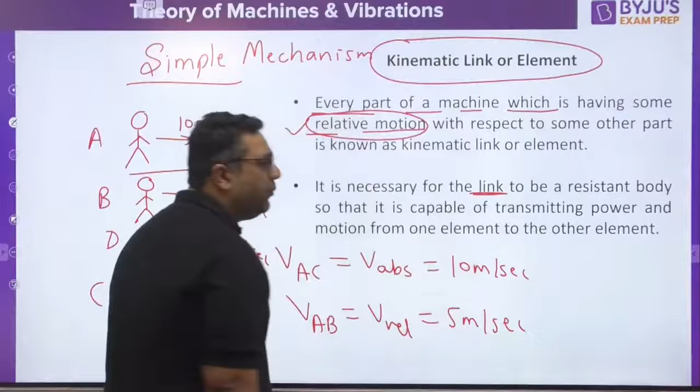So for a kinematic link, relative motion is required. So the second point is, a link may or may not be a rigid body. It may or may not be a rigid body, but it must be a resistant body.

Now what is the meaning of resistant and rigid? I would like to tell you briefly. When we talk about a rigid body, rigid body means deformation is zero, stiffness is infinite. So rigidity is not required, but resistance should be there.

What do you mean by resistant? Resistant means it must be capable of transferring the motion.

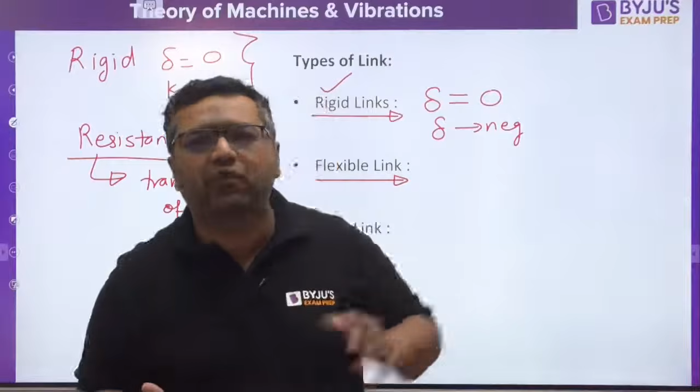Then we are talking about flexible link. Those links which may give some deformation before transferring the motion. For example, belt drive, rope drive. These are some wonderful examples of flexible link.

Third one is fluid link. Sometimes fluid also acts like a link, because you must have seen this type of device for the first time in 6th class, where there is a fluid inside and we apply a force, and with a small force we are capable of lifting a car. As fluid is there, when you apply pressure here, pressure will come here too. Here the area is more, so pressure into area gives force. So force will be more, and you can lift the car.

So all applications like hydraulic brake, hydraulic ram, hydraulic intensifier, hydraulic jack, all these applications are related to the application of link as a fluid link. And as I already said, turbine will not be coming in this list, turbine has some different principle. Is it clear for everyone?

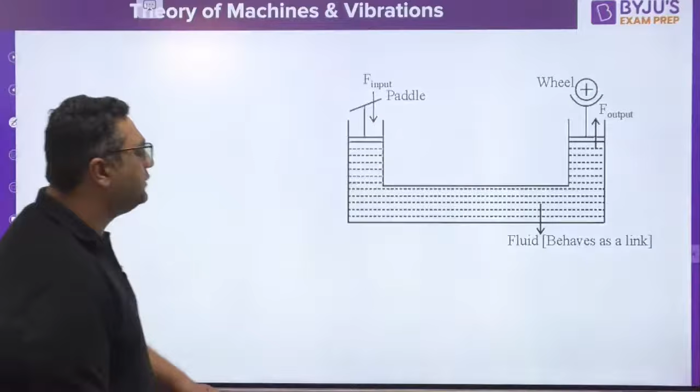We are talking about the types of relative motion, because for anything to be a link, it must have some relative motion. There are three types of relative motion: completely constrained, successfully constrained, and incompletely constrained. Incompletely constrained can also be called unconstrained.

What is the meaning of constrained? Whenever more than one possibility of motion is there, like in your childhood in 11th or 12th class, you had many places to go - you could go for studies, play games, or go to bad habits with bad friends. You had a lot of options, but your parents restricted your motion so that you could go for studies only. Whenever we have a lot of possibilities of motion but want some particular motion, we need to restrict the other motions. If we want the desired motion, we need to restrict the other undesired motions - that is said to be constrained.

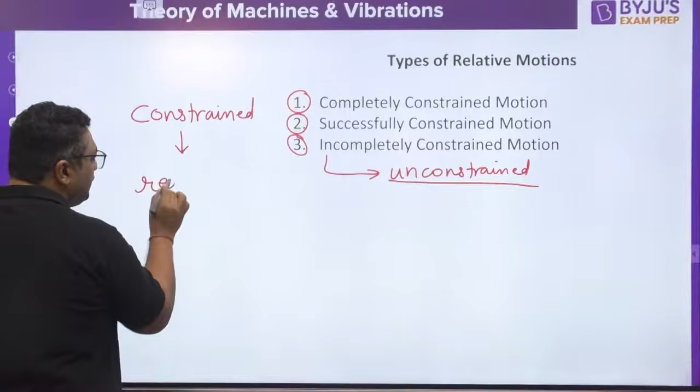So constrained is nothing but a kind of restricted motion. Constrained motion is nothing but a restricted motion. Whenever we have a lot of types of motion, we restrict the other motion and go for a single motion - that is called constrained motion.

When the constrained motion is possible by system configuration - meaning the system itself is not allowing any other kind of motion - we call it completely constrained motion. When you need to apply some forces to make the motion constrained, it is called successfully constrained motion. And when motion remains unconstrained no matter what you do, such motion is called unconstrained motion.

There are some examples. If you have a square shaft in a square hole, the square shaft cannot rotate - it can only have this one motion. So here the system configuration is not allowing any other kind of motion, and we call it completely constrained motion.

If you have a shaft like this, and on this shaft you have a collar, and you keep it in a circular hole, this reciprocating motion is not possible because the collar will not allow it - only rotation is possible. So this is another example of completely constrained motion, where the system configuration is not allowing any other motion.

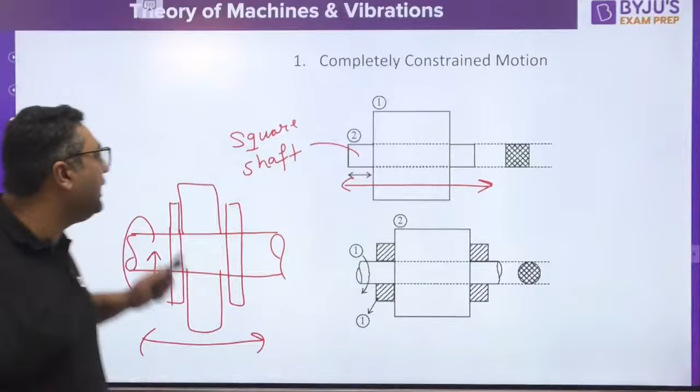Now we come to successfully constrained motion. The example is footstep bearing. This shaft can rotate and reciprocate, but you have applied an external force because of which this reciprocating motion will not be permitted - now the shaft can only rotate, but this is happening only because of this applied force. So this motion is called successfully constrained motion.

Yes, Shivananda, hi dear, how are you?

Third is incompletely constrained motion. Here you have a circular shaft in a circular hole without a collar. So this shaft can both rotate and reciprocate. Such a motion is said to be unconstrained motion.

In theory of machines, we are making mechanisms and machines only for production, so that in production we can have a desired motion of the cutting tool with respect to the workpiece. That is why in theory of machines we are always looking for constrained motion.

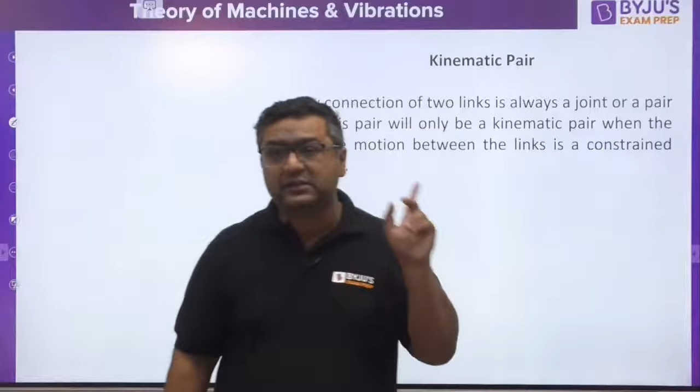Moving to the next thing, that is kinematic pair. Whenever two links are connecting with each other, it is said to be a pair - any connection between two links is said to be a pair. And if the relative motion between those links is a constrained motion, it is said to be a kinematic pair. So every kinematic pair is a pair, but every pair is not a kinematic pair. As I said, any connection is a pair, and if the relative motion is constrained, it is a kinematic pair. In theory of machines, we are looking for constrained motion.

Now we are going to classify the kinematic pairs. The first classification is according to the type of relative motion. The first type of pair is turning pair. If we have two links connected like this, these links can have rotation with respect to each other, because about this point they can only rotate. Such a pair is a turning pair.

You can see this example - between this part and this part of your hand, there is a turning pair. Then we are talking about sliding pair. Sliding pair means we have a cylinder and a piston, and between them we have a sliding pair.

Because the piston is going to slide over the cylinder.

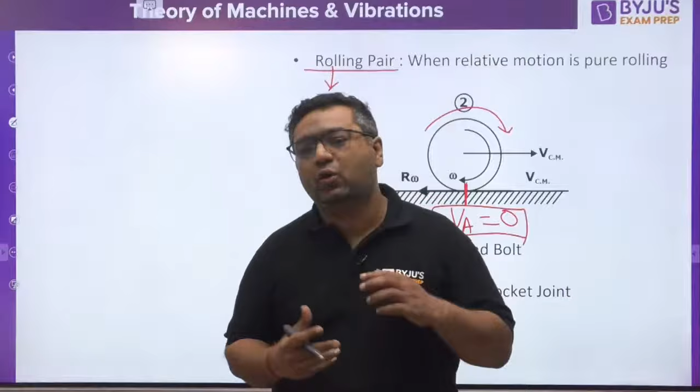It generally has a meaning when the area remains the same throughout the length. So in that perspective they are calling it a prismatic pair.

Okay Shreyas, so now please tell me, does anybody want me to explain what pure rolling motion is, or do you already know that? Let us see, if you want to see.

In pure translation motion, every point has the same translational velocity. Every point will be having the same translation velocity like this. So if this is having 5 meters per second, every point will be moving with 5 meters per second.

This is pure translation. When we are talking about pure rotation, the velocity profile is linear like this, and the center will be having 0 velocity. This type of motion is said to be pure rotation.

So in pure rotation, if this velocity is 5, this velocity will be 0, and this velocity will be -5. So if I add both the motions, what is going to happen?

First of all, understand what pure translation means. If this body is moving without rotating, it is pure translation. If this body is rotating about one point, this is pure rotation.

So if you are going to add both the motions, this 5 and this 5 will become 10. And this 0 plus this 5 will become 5. And this 5 and this -5 will become 0. So this is going to be the velocity profile.

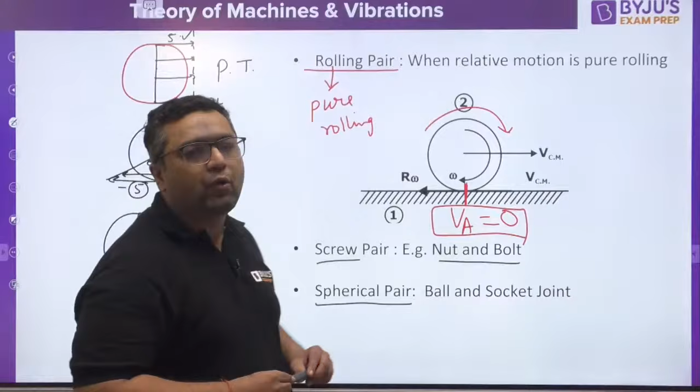So my dear, screw pair — you know, the nut bolt connection. Then spherical pair, if you want to understand, it is the ball and socket joint of your body. It is a bike mirror. It is your hand.

You can see 3-dimensional rotation is possible — 1st dimension, 2nd dimension, 3rd dimension. So between these two there is a spherical pair, between these two there is a turning pair. So likewise, there are a number of pairs in our body that God has given, and here the motion is going to be 3-dimensional rotation.

Okay guys, so this is the first classification over. We are moving to the second classification. Here are the examples of all. This is a turning pair, pure rotation.

Prismatic pair is pure translation, you can see the cross section remains same throughout the length. Screw pair is like a nut and bolt. Spherical pair gives 3D rotation. Cylindrical pair, and this is planar pair. These we have not seen before, but we are going to see them as well.

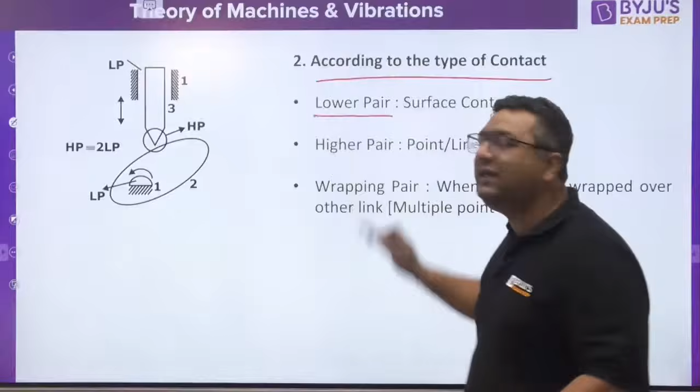Now we are going to see the second classification, and this is according to the type of contact. As per the type of contact, there are three types of pair: lower pair, higher pair, and wrapping pair.

Lower pair is whenever the contact between two links is a surface contact, and higher pair means point or line contact. Like in rolling pair, we were having point contact, so these two bodies are connected at point contact, and this is an example of higher pair. Similarly, between cam and follower also you can see there is a point contact, so it is also considered a higher pair.

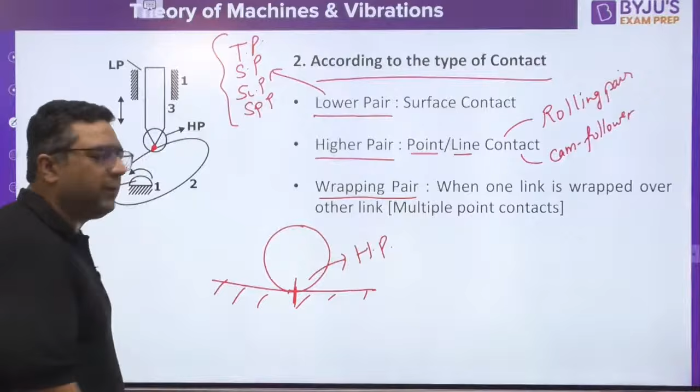But if you see the sliding pair, the complete cylinder and piston are in contact, complete surface is in contact. So if you see other types of pair like turning pair, sliding pair, screw pair, spherical pair, all these are examples of lower pairs, because this part and this part are not connected at a point, they are connected at a surface. So you will be calling them lower pair.

Whenever one body is going to wrap over another, like belt drive, rope drive, chain drive, where one body is wrapped over another, it is given the name of wrapping pair.

Sometimes the examiner in the question does not give wrapping pair as an option. He just asks that belt drive is an example of, and in the options you will be having lower pair, higher pair, option C both lower and higher pair, option D cannot say. So in this kind of case, generally students feel it is lower pair because they feel surface contact is there.

But in reality, the pulley is also not having a very good surface finish. So the pulley in reality looks like this, there are some surface roughnesses and irregularities. Similarly, if you are talking about rope or belt, that also has that kind of surface, so the contact is at multiple points. Because of this multiple point contact, we are considering it as higher pair. So if wrapping pair is not in the option, we will call it a higher pair.

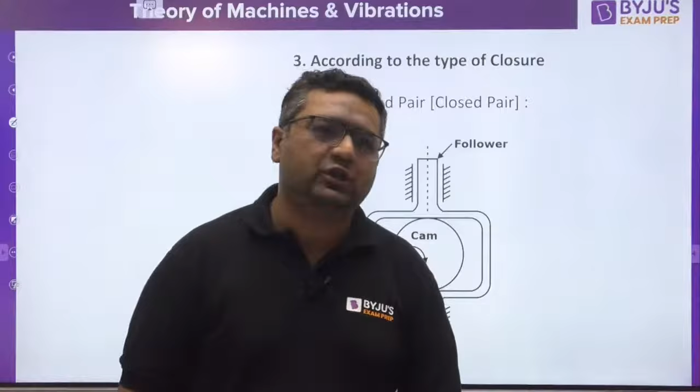Now we are going to see the third type of classification, that is self-closed and force-closed pair. Self-closed means here the cam is inside the follower, so as the cam rotates, this follower will go up or down. This is the case of a self-closed pair.

Whenever we have forceful connection, here when the cam is going to rotate, the follower will be having upward motion, so to maintain contact between them, we are keeping a compressed spring here, forcefully maintaining the contact. In the previous case, even if the follower wants, it cannot go away from the cam because the cam is inside the follower. But in this case, the follower can go upward, and the spring is there to maintain the contact between them, so this is forceful contact, and it is said to be a force-closed pair.

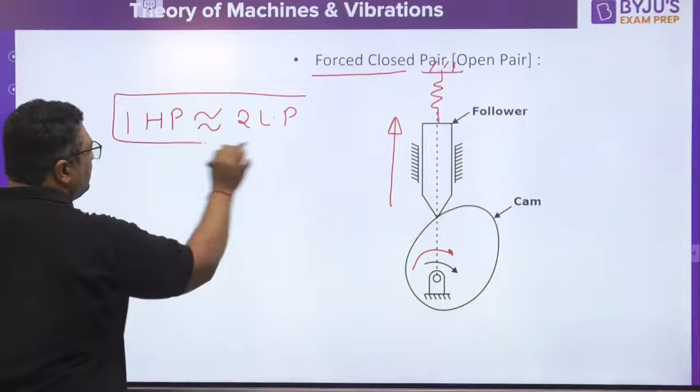One more thing I would like to tell you, that one higher pair is equivalent to two lower pairs, because one higher pair is doing the same work which two lower pairs together are doing.

So when we look at this higher pair and lower pair connection, you have this cam and follower. This is link number 1, cam is link number 2, follower is link number 3, and this is link number 1 again. So total number of links are 3. This is a turning pair because rotation is going on, this is a sliding pair because sliding is going on, and this is a higher pair.

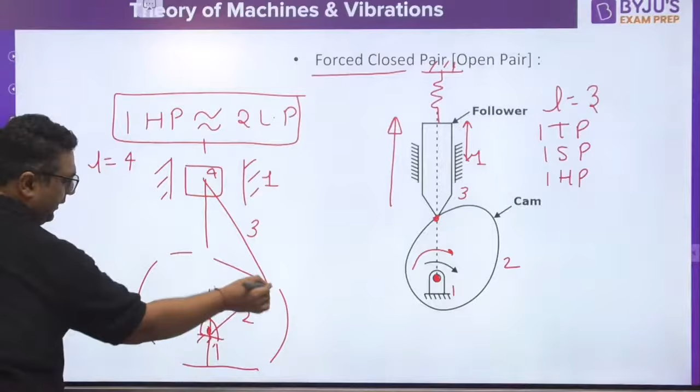So there is one turning pair, one sliding pair, and one higher pair. On the other hand, if we talk about a slider having sliding motion inside the cylinder - this is connecting rod, this is crank, and this is fixed. This is link number 1, link number 2, link number 3, link number 4, link number 1. So links are 4 here. This is turning pair, this is turning pair, this is turning pair, and this is sliding pair.

So we have 3 turning pairs and 1 sliding pair. In both mechanisms, rotation is converted into translation. Rotation of crank gives you translation of slider, rotation of cam gives you translation of follower. So any two mechanisms, if they produce the same type of motion, they may look different in your eyes, but as per theory of machines, if two mechanisms give the same relative motion, they have the same meaning. So according to theory of machines, both are doing the same work.

So if that is the case, both are equivalent mechanisms. Here we have 2 lower pairs and 1 higher pair, but here we have 4 lower pairs. It means 2 lower pairs are equivalent to 1 higher pair. So the purpose solved by 1 higher pair here is the same done by 2 lower pairs there. Always remember, 1 higher pair is equivalent to 2 lower pairs.

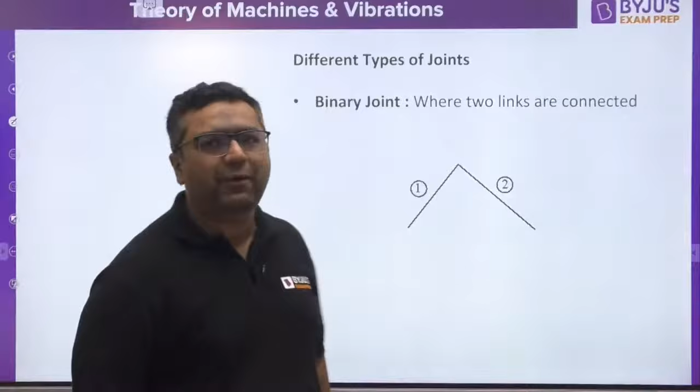Moving further, now we talk about different types of joints. When 2 links are joined together like this, you can see link 1 and link 2 are connected at one joint - it is said to be a binary joint. When we have 3 links connected at one joint, it is said to be a ternary joint, and one ternary joint is equivalent to 2 binary joints.

Why? Because if you make a binary joint between 1 and 2, that's one binary, and a second binary between 2 and 3, the third binary you get automatically. That's why one ternary is equivalent to 2 binary joints. Quaternary means where 4 links connect together, and one quaternary joint is equivalent to 3 binary joints. You might be thinking why we convert these to binary - because all our formulas in theory of machines use the binary joint in the formulas. That's why we convert all joints into binary. So one ternary is 2 binary and one quaternary is 3 binary.

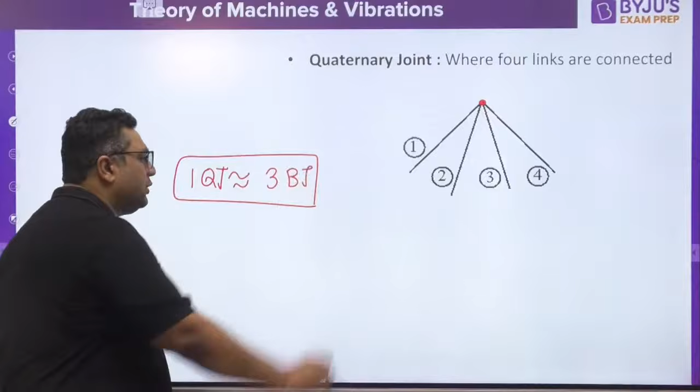Are you getting it, guys? Everyone, please tell me that.

Then we move to kinematic chain. Slowly we are moving towards the word mechanism. We have already discussed what is a link, and we have discussed what is a pair. Now we talk about the chain. When a number of links are connected together such that the first and last link are also connected, it is said to be a chain. And if the relative motion between all those links is constrained, then we call it a kinematic chain.

Whenever we have a kinematic chain, if we fix one link of that chain, it becomes a mechanism. And whenever we use a mechanism or a group of mechanisms to get some work output, it becomes a machine. Like an IC engine is a machine - the single slider crank mechanism chain, whenever one link is fixed, is said to be a mechanism. So when it is used, it becomes a machine.

So my dear, if you want a machine, for that we require some mechanism. And when will you get a mechanism? When we have a kinematic chain. So overall we are looking for a kinematic chain. As I said, this is a revision session - whatever you studied in 80 hours, I am going to complete in 2 to 2.5 hours, so don't compare. Those who have already studied theory of machines will get a good revision. So when we are looking for a kinematic chain, chain will become mechanism, mechanism will become a machine. For that there are some conditions.

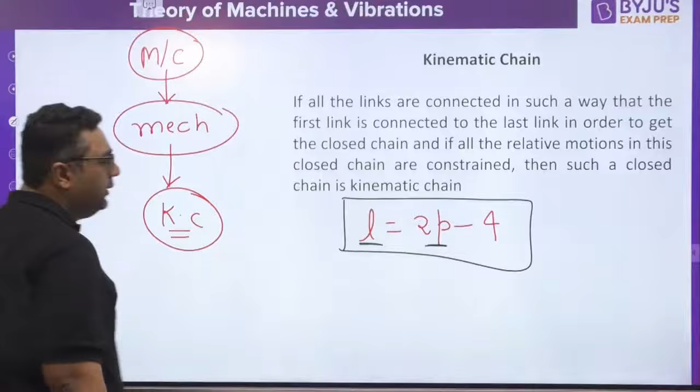So we have joint is equals to 3 by 2 L minus 2. Here L is the number of links, J is the number of joints. But don't worry, we are going to use the formula of degree of freedom, so we need not write this. I will directly be telling you the degree of freedom, otherwise you will get confused, and the degree of freedom formula comes from that only.

So you have studied this formula: F is equals to 3L minus 1 minus 2J minus H. This is what you have studied for degrees of freedom. This formula actually comes from the same one I was writing properly. So this is what you need to remember - I am not writing other formulas because this one formula will solve all the purposes. Why? Because finding out the kinematic pair is going to be difficult, so it's better we go for the degree of freedom formula.

So we are reaching the concept of degree of freedom. This is the first heading from where numericals are coming. When we are talking about degrees of freedom, you must be aware that degree of freedom is the number of independent motions in a mechanism.

So if we have any link in 3 dimensions, we can have 6 types of motion: translation in X, translation in Y, translation in Z, rotation about X, rotation about Y, and rotation about Z. So 6 motions are possible, meaning maximum degree of freedom of a link in 3 dimensions is 6. If any of the motion is restricted, we call it F is equals to 6 minus R.

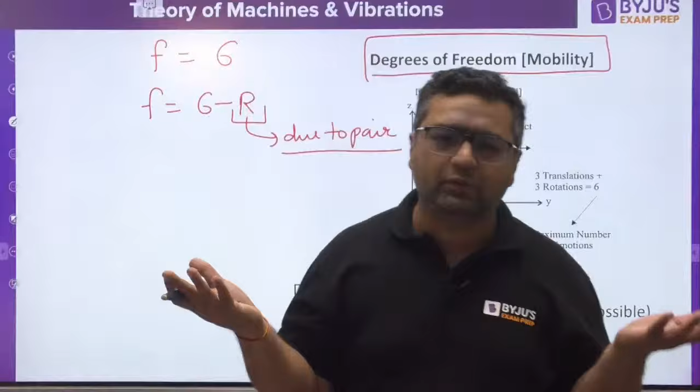But why will these restrictions come? Due to pairing. Whenever you have pairing with someone, restrictions come. Living alone, you have 6 degrees of freedom, meaning you are enjoying the maximum degrees of freedom. When you have relationships, you have to be restricted based on that relationship, otherwise the relationship can break. So some restrictions come, and the formula becomes 6 minus R - this is the formula for degree of freedom when a link has some pairing arrangement.

You might have one confusion - why not degree of freedom are 12? For that you must be aware that 12 degrees of freedom are considered in the production part. Why? Because there, if we have a workpiece like this and tool like this, if the cutting tool is moving in this direction, cutting will happen. In this direction, cutting will not happen. So there, positive X and negative X will have different meanings.

But in theory of machines, our target is to create motion. So as we are only talking about creating motion, for us X direction positive or negative, we consider the same. As this is the formula revision session, I would directly be writing the formula for degree of freedom for a mechanism.

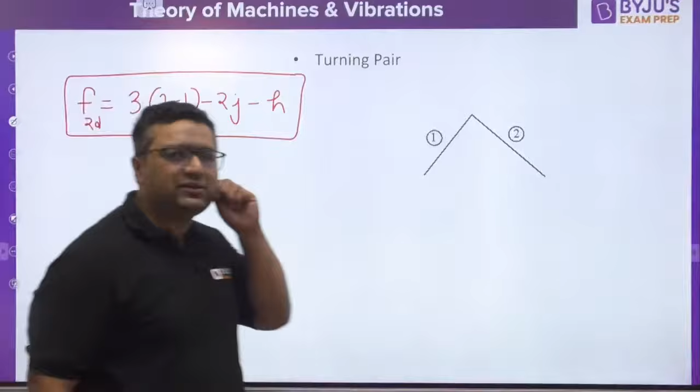When we are having a mechanism, the equation is 3L minus 1 minus 2J minus H. This is the formula for degree of freedom for a mechanism in 2 dimensions, because in our syllabus 3 dimension is not there. In 3 dimensions maximum motions are 6, in 2 dimensions maximum motions are 3. So for a link maximum are 3, and for a link in a pair it is 3 minus R.

So when we are talking about a turning pair, the link can have only one rotation motion. All other motions are not possible. That is why for a turning pair, degree of freedom becomes 1.

Now you would remember when I was teaching in class, I took 30 minutes for that turning pair. But here it is a revision session, so I would just be giving you a revision. This session is helpful for those who have already studied theory of machines and just want a quick revision for remembering things, nothing else. The same subject which I taught for 80 hours, I am going to deal with in 2.5 hours. Only formulas are there, but this is a very good session for revision purpose.

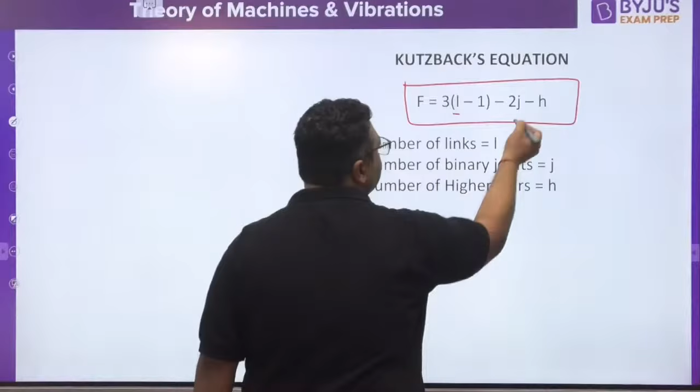So this equation I wrote before is said to be the Kutzbach equation. L is the number of links, J is the number of binary joints, and H is the number of higher pairs. There I also told you how this equation came into picture, if you remember that, and I also derived this relation, how it comes. Here no derivation, we are directly writing the formulas. I feel you understand because this is a formula revision session.

Moving further, there are some cases where some redundant motions are there. What is redundant motion? If you see here, this link is placed with a sliding pair in this groove. So this time it is not connecting with a turning pair, but with a sliding pair. So if you give a slight push to this link, it will go away, and if this link goes away, the motion of this link will not affect the input and output link. So if any motion is present in a mechanism which is possible without having the motion of input and output link, such motions are said to be redundant motions.

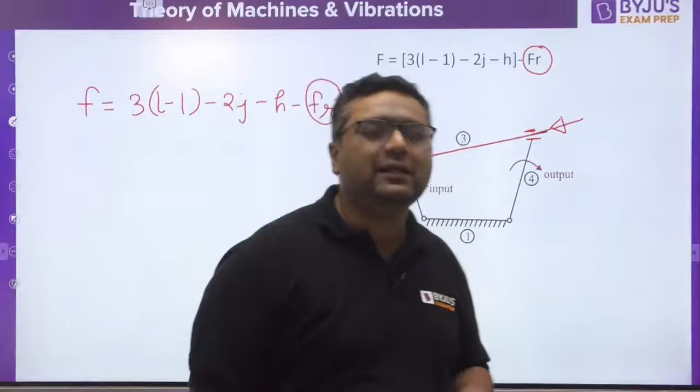And if you want to find out the degree of freedom of this, we need to subtract this redundant motion part. So the equation was modified and given the name modified Kutzbach equation: 3 into L minus 1 minus 2J minus H minus FR. Here FR is the redundant degree of freedom. So this link, you will not say the link has no use — that is different, that is the concept of redundant link. It is not redundant link, it is redundant motion. This link is having an extra motion which can be reduced because that is not playing any part in degree of freedom. That is the point.

In actual, what will happen — if you give rotation to this link, it will go away and this will become a 3-link thing. And you know, whenever this happens it is becoming a truss. Truss is not having any relative motion, so degree of freedom for this truss is going to be 0, you know that. So that is why we are using this.

So if you are going to use it, number of links are 4. Number of joints — sliding pair is also considered as binary joint. This is also binary, this is also binary. So this is 2 into 4. There is one redundant motion. So the answer will be coming out to be 0 because it is converting into a truss like that. That is why the answer will be coming out to be 0.

So guys, this is Kutzbach paradox. Kutzbach paradox.

This is something on which neither Kutzbach equation is valid nor modified Kutzbach is valid. Because if you see this, we have link 1, 2, 3, 4 and 5. So the number of links are 5. The number of joints are 1, 2, 3, 4, 5, 6, so 6 joints. And there is no higher pair, no redundant motion.

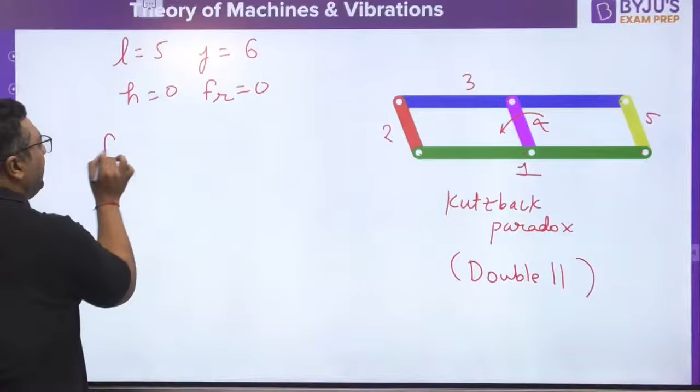Why? Because if you try to rotate this link, the entire mechanism will rotate, because it is a double parallelogram linkage. It is a double parallelogram linkage. So my dear, when you apply the formula 3 into L minus 1 minus 2J minus H minus FR,

FR is 0, H is 0. You will put 3 into 5 minus 1 minus 2 into 6. So you will be having 12 minus 12, and the answer will come out to be 0.

But you know this linkage is used in railways to couple the wheels. And where you are coupling the wheels in the railways, you have seen this motion going on, that's why the wheels are rotating. So the degree of freedom is coming out to be 1 actually. So degree of freedom should be 1, but here we are getting 0. So as the Kutzbach equation is giving a wrong answer, we call it the Kutzbach paradox.

The reason is, if you see the motion of link number 2, 4 and 5 - if you have this link number 4, or if you don't have link number 4, the relative motion between input and output link will not change. So this is a situation where we can say link number 4 is a redundant link. It means we can remove this link for calculation purposes because it has the same motion as input and output.

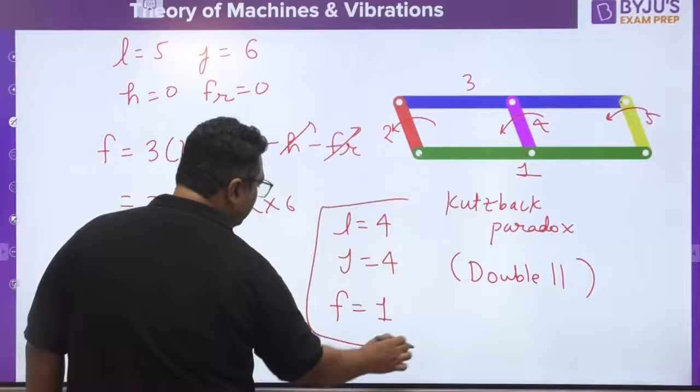That is why for calculation purposes we remove such links, and if you remove this, it becomes a 4 bar mechanism. The number of links will be 4, the number of joints will be 4, so the answer will come out to be 1. So that is how redundant link and redundant motion are two different things.

Okay, moving further, Grubler's equation. You know that Grubler said we are talking about the mechanism for which higher pair is 0 and degree of freedom is going to be 1. So he was interested in mechanisms made up without any higher pair.

I feel you would be remembering, when degree of freedom is 0, we are getting a frame. When degree of freedom is 1, we are getting a mechanism. Degree of freedom more than 1, we are getting unconstrained motion. Okay, so when we have degree of freedom 1, higher pair 0, let us see the formula of Kutzbach.

You know higher pair 0, degree of freedom 1. This is the equation: 3L minus 2J minus 4 is equal to 0. If you see this equation, 3L minus 2J minus 4, or 3L equals 2J plus 4.

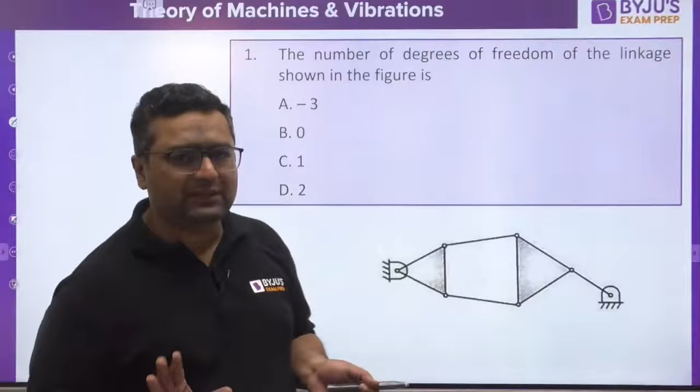Okay, so this is a question I am taking - otherwise this is formula series, but still I am taking one question for your convenience.

Okay, this is link number 1. This is the hashed part, link number 2, link number 3, link number 4, link number 5, link number 6, and back to link number 1. So you can say, my dear, number of links are 6.

If you see the joints, binary, binary, binary, binary, binary, binary, and binary. So 1, 2, 3, 4, 5, 6, 7. Number of joints are 7.

Degree of freedom formula is 3 into L minus 1, minus 2J, minus H. Higher pairs come out to be 0. So you put 3 into 6 minus 1, minus 2 into 7. So guys, it is going to be 15 minus 14. Answer will be 1. So this is how the first type of questions are coming on degrees of freedom.

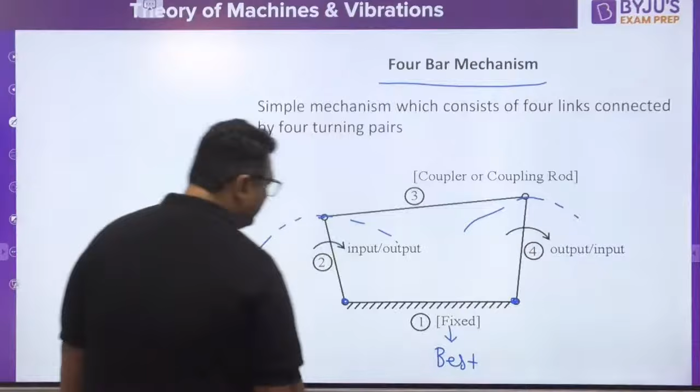If you see, the motion of input and output are going to be pure rotation because they are connected with the fixed link. So because of that, their motion is well-defined. That is why this is said to be the second best position, as the motion is well-defined.

But my dear, when we are talking about link number 3, which is just in front of the fixed link, this is said to be the coupler. This is not connecting with the fixed link, it is connected with the 2 moving links. So my dear, that is why its motion is not a well-defined motion.

Its motion is a general motion. I am not saying it has variable velocity, but it has variable motion. Sometimes it has translation plus rotation components, sometimes translation will be more, sometimes rotation will be more. So the motion of this link number 3 is given the name of general motion.

General motion is a combination of translation and rotation, and that is also a rough combination. So translation and rotation components are also variable. Sometimes translation will be more, sometimes rotation will be more. So such motion is given the name of general motion.

In this mechanism, there are 4 turning pairs, 1, 2, 3 and 4. So guys, whatever I have shown you, you can compare these positions.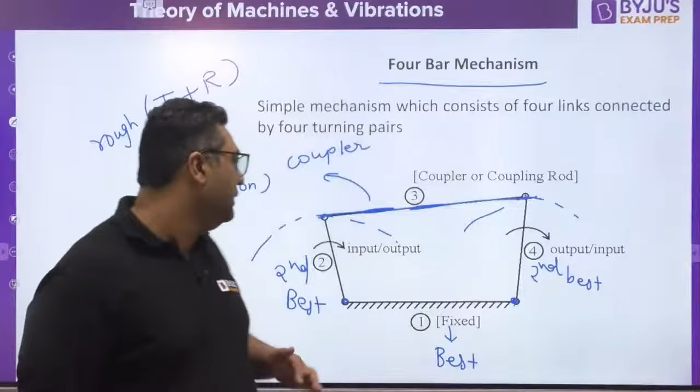Like link number 1 is the best position, this position is governing the motion of all. It is like the position of the Prime Minister in our country or our father at home, who is going to govern everything. Then the second best position is like the position of ministers or bureaucrats, who can do things for themselves at least. This is the position of the common man, who is going to be dancing based on the rules coming from these other sides.

Okay, so these are the analysis of 4-bar mechanisms.

Now we are going for inversions, which is a very, very important heading, and from here a lot of questions are coming.

So when we talk about inversions, my dear, if we have a 4-link kinematic chain, 1, 2, 3 and 4, this is a kinematic chain. You know that if I want to make a mechanism from a kinematic chain, what do I need to do? I need to fix one link of this kinematic chain, and I will get a mechanism.

But which link will I be fixing? For that I have 4 choices: choice number 1 link, choice number 2 link, choice number 3 link, choice number 4 link. So one by one, first I will fix 1, then I will fix 2, then 3, then 4, only one at a time, and I will get a set of mechanisms. That set of mechanisms is given the name of inversions.

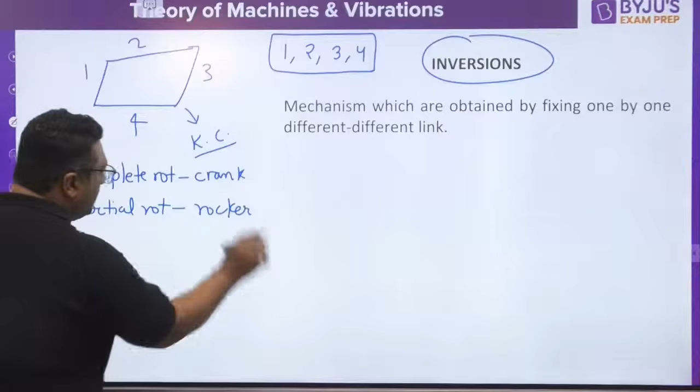So my dear, first of all, we are going to fix link number 1. Whenever we have fixed link number 1, we have seen the input is having complete rotation, meaning crank. Output is also having complete rotation, meaning crank. So the name of the mechanism is crank mechanism or double crank mechanism. This is the case when two links are going to have complete rotation like this.

Second, if we are going to keep link number 2 as fixed, we have seen that the input link was found to be crank and the output link was found to be rocker. So input was having complete rotation and output was having partial rotation like this.

Then my dear, we have seen the third possibility where link number 3 was kept fixed. Then we found this was becoming the rocker and this was becoming the crank. So this time this was rocker and this was crank, opposite to the previous one.

When we have fixed the fourth link, we are getting rocker here and rocker here. These are the 4 possibilities I am talking about. So rocker means this type of motion. This type of motion is rocker mechanism.

So guys, if you see these 4 possibilities, you can say these are 4 inversions. But my dear, the reality here is, if you see crank rocker and rocker crank, if I am saying this is crank rocker and I rotate it by 180 degrees, it will become rocker crank. So if you have a machine in your home and you rotate it by 180 degrees, the name of the machine is not going to change. So the point is, crank rocker and rocker crank is only one type of relative motion. And until we have one type of relative motion, those mechanisms cannot be different.

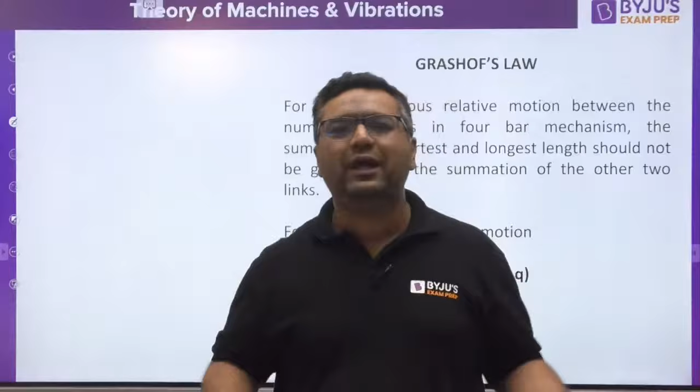Then we are moving to the Grashof law. So my dear, we have seen the types of inversions we can get. Now out of those types of inversions, when are we going to get what? This was given by Sir Grashof, and he has given a wonderful law on that.

Sir Grashof said that you should look for at least one crank. Why at least one crank? He was looking for a continuous motion. Crank is rotating continuously, whereas rocker has a discontinuous motion. So if you are looking for continuous motion, which comes with crank, he was looking for at least one crank in a mechanism. At least one crank means either double crank mechanism, which will give you continuous motion, or crank rocker mechanism, which will give you continuous motion. Double rocker has this discontinuity like this. He wanted continuity.

So Grashof said that if you want at least one crank, then the summation of the shortest and longest link should be less than or equal to P plus Q. There are 4 links: one is shortest, other is longest, other is P, other is Q.

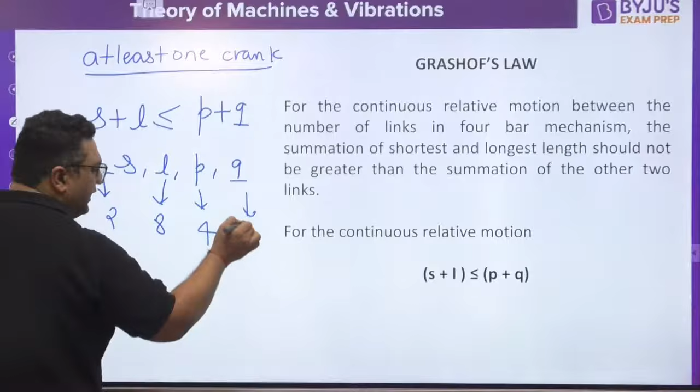So let us say one link has a length of 2 mm, other has a length of 8 mm, this has a length of 4 mm, this has a length of 5 mm. So you can see here 2 plus 8 is becoming more than 5 plus 4. So this is the case when Grashof's law is not valid. And when it is not valid, you are going to get discontinuity, which is nothing but the double rocker mechanism.

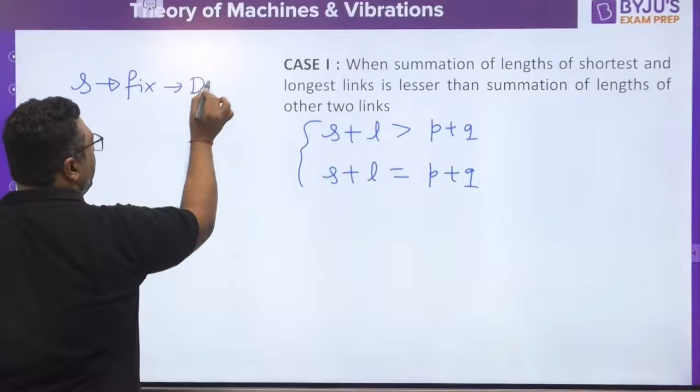If we have these two cases, then what Sir Grashof said is: if you keep the shortest link fixed, you will get a double crank mechanism. This is based on the observation of Sir Grashof. If shortest link is fixed, the mechanism will be given the name of double crank mechanism. And if the shortest link becomes either the input link or output link, then you will have a crank rocker mechanism. And when the shortest link becomes the coupler, you will have a double rocker mechanism.

Now, this was the condition where even though the Grashof law is satisfied, still we are not getting any crank. So this was a challenge to the Grashof law, but since Sir Grashof did this work over 5 to 6 years with a lot of observation, maybe it is not valid for this case, but we still call it a law, and we say this happens because of misutilization. Because where you want to keep the shortest link is totally your choice. If you keep it as the coupler, you will not get any crank, meaning you intentionally want a double rocker mechanism. So that is the feeling behind crank rocker and double crank mechanisms. We have already talked about this case.

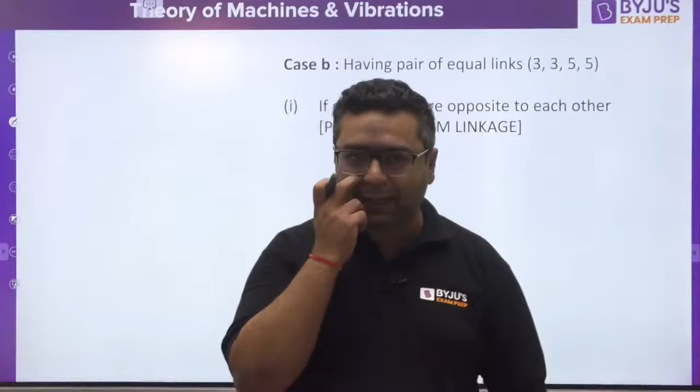So now we are talking about the third case, where we have two shortest links and two longest links. This time two links have the same length, and the other two links also have the same length. If you connect them, again S plus L becomes equal to S plus L, so the law is satisfied. This time two mechanisms are possible.

The first mechanism is when you connect shortest with longest and longest with shortest. Then you get what is called a parallelogram linkage. And when you connect shortest with shortest, longest with longest, then this linkage is called a deltoid linkage.

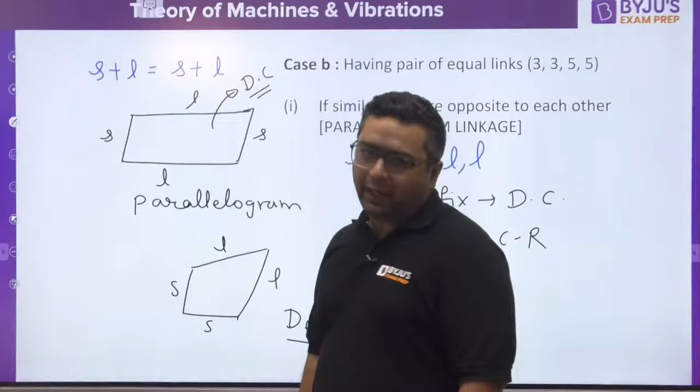In these two mechanisms, there is something special: you will always get one crank. If the shortest link is fixed, you will have a double crank. If the longest link is fixed, you will have a crank rocker. And if you are talking about the parallelogram linkage specifically, in this case you will always get a double crank. That's why these chains are also called the golden chains.

In the classes, I have derived this for you, that's how 80 hours are converted into 2 to 2.5 hours. Here I am just telling you, but there I was deriving all the things and showing everything with animations. So guys, that's why these are called golden chains, as they always follow the Grashof law.

Everybody understood now? Are you getting it? Because this is a formula series, and in 2 hours I need to cover all the formulas, so I cannot go for detailed animations and derivations.

When the law is not satisfied, you will say it's a double rocker mechanism. So we have covered this. Now we are coming to something very important: the application of the 4-bar mechanism.

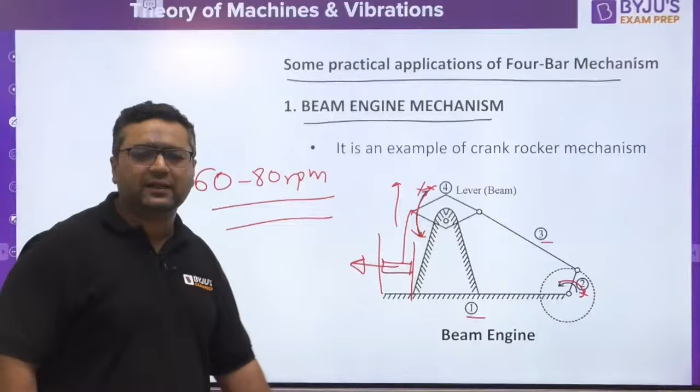Second is the coupling rod of locomotive. If you want to join two wheels of a train, you will have this coupling rod joining the two wheels. This is a parallelogram mechanism, so this is said to be the coupling rod of locomotive. Even if you are going to join three wheels, you need to go for the double crank mechanism. Is it clear?

Yes guys, so we have seen these applications of the simple 4-bar mechanism. This is the animation of the coupling rod of locomotive, showing how the wheels are coupled with each other.

Now I am telling you about the transmission angle. In this simple 4-bar mechanism, if it is a crank rocker mechanism, then this link is given the name of crank, and this is given the name of rocker. So with this as crank and this as rocker, this angle is given the name of crank angle.

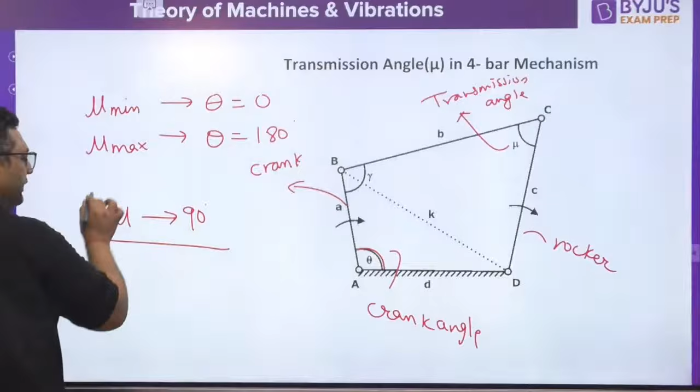And this angle is said to be the transmission angle. When we did the derivation in class, we got to know that this transmission angle is minimum when theta is 0, and maximum when theta is 180 degrees. The transmission angle should be near to 90 degrees. If it goes much beyond that, lesser than 45 degrees or more than 115, 135 degrees, the mechanism will become a low quality mechanism and may not have complete output motions. So you have studied this about the transmission angle.

Now we are talking about mechanical advantage. Mechanical advantage is defined as output force by input force, or output torque by input torque. In thermodynamics we defined efficiency as power output by power input. Power output is given as torque output into omega output, or torque input into omega input. So if you see this, efficiency can be written as mechanical advantage into omega output by omega input.

So you can see that mechanical advantage can be written as efficiency times omega input by omega output. This is the relation between them. Efficiency is always less than or equal to 100%. Mechanical advantage is always more than 100%, otherwise it will not be an advantage. So guys, as I said, I am telling you all the formulas directly.

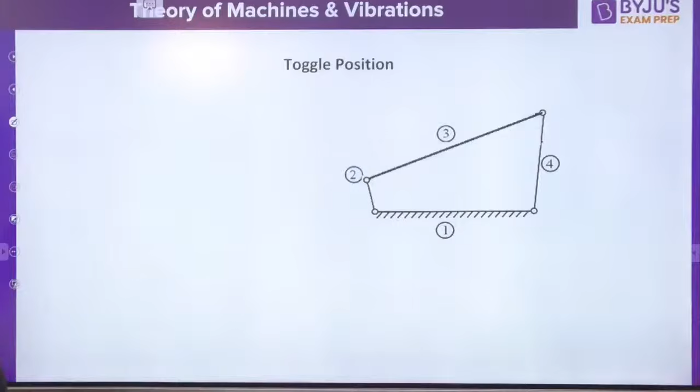Now I am talking about the toggle positions in a mechanism. Toggle position is a position when one link is going to change its direction of motion. If it is a crank rocker mechanism, the crank will rotate like this and the rocker will have this motion. So when the rocker reaches this or this position, it is going to change the direction of motion. So for these two positions, the velocity of link number 4 becomes 0, and these positions are said to be the toggle positions.

Why is it so? Because if you see the mechanical advantage formula, it was efficiency times omega input by omega output, and the fourth link is output. So at this position, efficiency into omega input by 0 will give you infinity. So toggle positions are those where you get a mechanical advantage of infinite. This is the definition of toggle position.

Now we are moving to the single slider crank mechanism. As I said, this is the formula session. I will just tell you the names of the inversions, not going into detail of that.

Otherwise we will be unable to complete even 2 chapters, so don't worry. We need to go for one more session on TOM plus MD. One session is not enough to complete it, but we will try to cover at least 3-4 topics today, and one more session we will keep on next Saturday or Sunday to complete it. So we are going to see single slider crank mechanism.

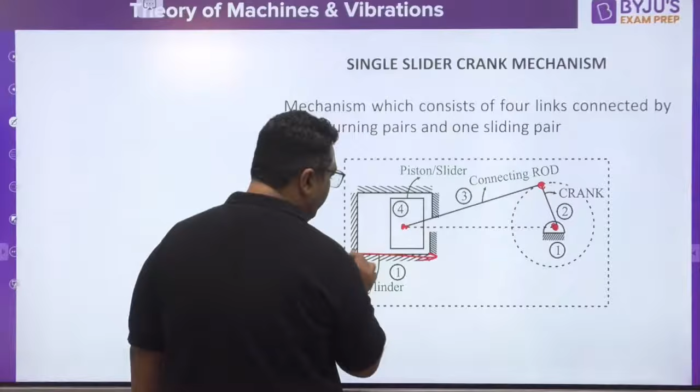You know that here this is a cylinder, this is piston, this is connecting rod, and this is crank. Here this is turning pair, this is turning pair, this is turning pair, and this is sliding pair. So you can see 3 turning pairs and 1 sliding pair.

In simple 4-bar mechanism we were having 4 turning pairs. So when one turning pair of simple 4-bar mechanism is converted into sliding pair, it becomes single slider crank mechanism. This you can say is one configuration of 4-bar mechanism only. And 4-bar mechanism was the first mechanism of the universe, that's why we call it simple 4-bar mechanism, what we have studied before.

This is the other configuration of this, so this is not said to be simple. Simple is the first one, this is the second one. So if you see this, here there are 4 links: one is cylinder, other is piston, other is crank, other is connecting rod.

So if you see these 4 links, there are once again 4 possibilities of inversion. When you will be fixing one link, you will get one inversion. So for 4 links we can get 4 inversions. I am telling you what inversions we are going to get.

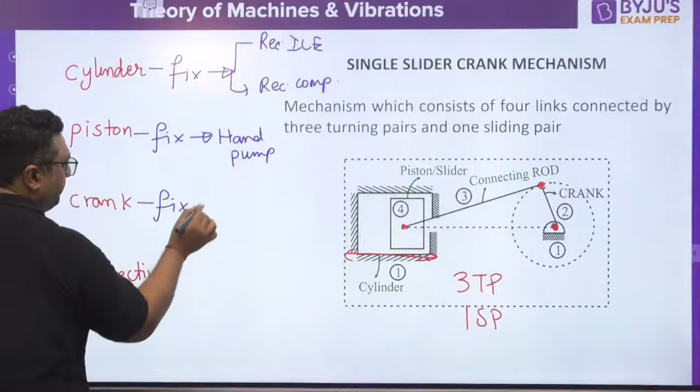When cylinder will be kept fixed, you will get either reciprocating IC engine or reciprocating compressor. Then if you will be fixing the piston, you will be getting the hand pump. If you will be fixing the crank, we will be getting Whitworth quick return motion mechanism, and when you will be keeping the crank to be fixed, you will be getting one more thing, that is rotary IC engine. So these are the things which we will be getting.

So both are 2 configurations of the same mechanism. When you are keeping the cylinder fixed, you are going to get rotation to reciprocation, this is the relative motion. Here when you are fixing the piston, you are going to get oscillation to reciprocation. Here you are going to get rotation to rotation.

And when connecting rod is fixed, you will be getting 2 configurations once again, mechanism is one only. That is crank and slotted lever mechanism, quick return, and second is oscillating cylinder engine.

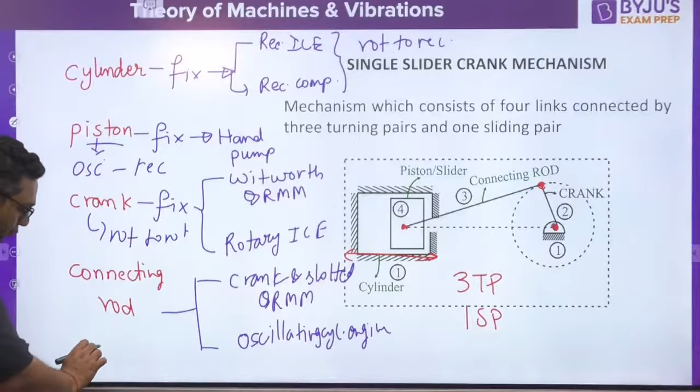So if you see these, keeping one by one fixed, you are getting these kinds of inversions. Here you are going to have the motion to be rotation to oscillation. If you see, all 4 inversions have different relative motion: rotation to reciprocation, oscillation to reciprocation, rotation to rotation, and rotation to oscillation. So all 4 relative motions are different here.

So let us see. The first inversion is IC engine or compressor. If you are having input at crank, output at piston, it is compressor. If you have input at slider, output at crank, it is IC engine. This you are getting when cylinder is kept fixed. When crank is fixed, we are getting Whitworth and rotary. So one by one, let us see that.

First of all, when connecting rod is kept fixed, we are going to have this crank and slotted lever mechanism. Here you are going to apply some motor which will give rotation to the crank. When the crank will be rotating, crank is connected with the slider, so this slider will also rotate. This slider is kept into this slotted bar, so the slotted bar will oscillate like this whenever the slider is going to rotate like this.

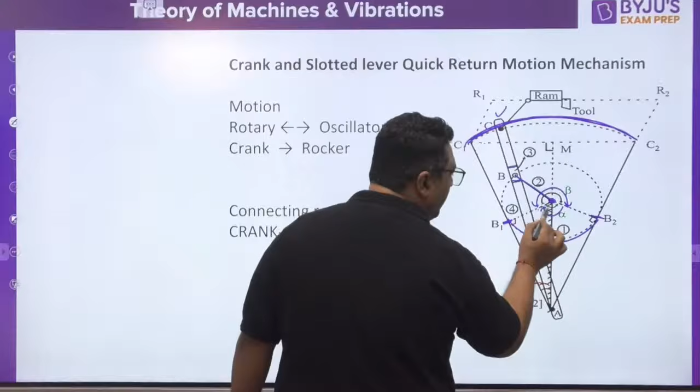So when the slider goes from B1 to B2, this goes from C1 to C2. And when the slider goes from B2 to B1, it will be coming back from C2 to C1. So you can see in forward motion you are going to cover beta angle, in backward motion you are going to cover alpha angle, and beta is more than alpha. As the motor is going on with constant angular velocity, beta by time is angle by time of forward stroke, angle by time of return stroke, and omega is a constant.

Beta is more than alpha, so the time of forward stroke is more than the time of return stroke. Forward stroke is slower and return stroke is faster, and that is the requirement also. In case of shaper and planer, we go in forward stroke slowly, slowly, slowly, and in return we come faster. Why? Because the return stroke is an idle stroke. So this type of mechanism is used in shaper and planer.

If this crank has a radius of R, this fixed link has a length of L, and this slotted bar has a length of S, then the stroke length covered by C1, C2 or ram R1, R2 is given by the formula 2 times length of slotted bar times R upon L. This is the formula for stroke length, which depends on these 3 parameters. So changing any of these parameters, we can change the stroke length of the mechanism. It is used in shaper and planer.

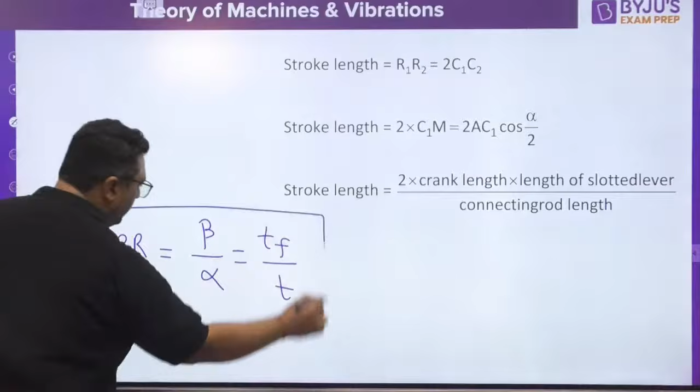As already discussed, beta by alpha, or TF by TR, is given the name quick return ratio. So TF by TR, beta by alpha, is the quick return ratio.

This is the Whitworth mechanism. Initially this was used for shaper and planer, but nowadays it is not used, because here the stroke length is given as the diameter of the smaller circle. So here only one parameter is there to change the stroke length, whereas in the other mechanism we have 3 parameters.

In this mechanism, this is the fixed link, motor is attached here. So as the rotating link goes from this position to that, this point on the smaller circle will be moving from C1 to C2, and the ram will be going from R1 to R2. The reverse will happen for the second angle, so the same story repeats again.

Next is the oscillating cylinder engine. I am showing you the animation also. This is used in small ship engines because of its compact construction. If you see this, the cylinder is rotating like this.

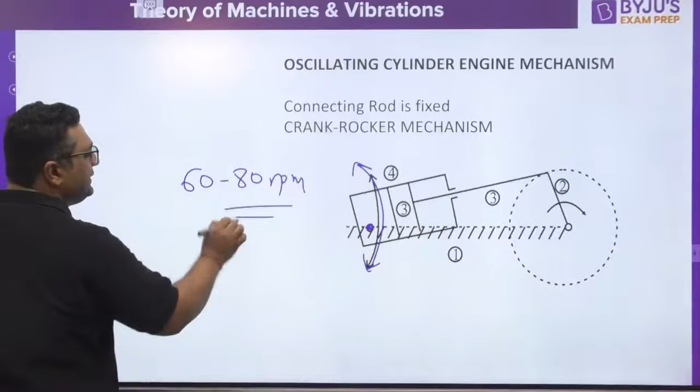This is the second attempt by Sir James Watt and team to make the steam engine. It was also a failed attempt, because a very heavy cylinder was rotating about a small pin. So if you had more than 80 RPM of this cylinder, the mechanism would fail. That is why this gives very low speed, 60 to 80 RPM. So it is used for demonstration of small ship engines even nowadays. It was the second attempt, as I already said. You can see this is the animation of the same.

Moving further to the rotary IC engine. Let us take this case of a rotary IC engine. You can see there are a number of cylinders, all joined on a cylinder block. Whenever combustion happens here, there is pressure on the piston. When the piston tries to move, since this link is fixed and cannot rotate, it will instead rotate the cylinder. Similarly the others will also rotate it, because the complete block has all these cylinders. So the entire cylinder block rotates, and this rotating cylinder block is connected with the aircraft. The very first aircraft made by the Wright brothers used this concept only.

Then we have the animation, this is how it is going on, showing combustion happening in different cylinders.

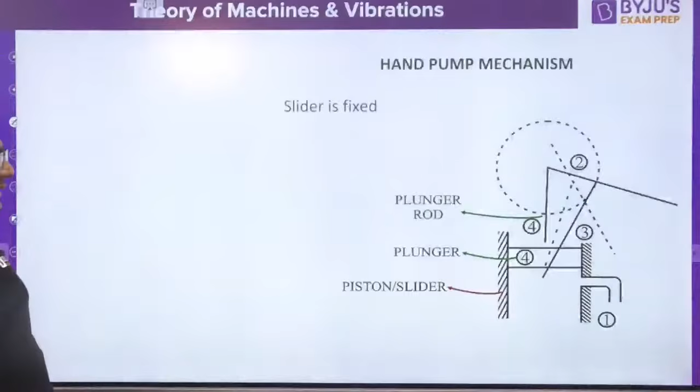Then this hand pump: when the slider comes up, water comes up, and this happens as this link oscillates. So input is oscillation, output is reciprocation. If you remember, earlier in class I showed how the hand pump mechanism is made, so this is just revision, not going into that detail. This is the double slider crank mechanism now.

If you see here, two turning pairs are converted into two sliding pairs, so it is becoming a double slider mechanism. This mechanism is called a slotted plate. You can see this is one slider, this is another slider, and this is the link connecting the sliders. So here also we have four links, four possibilities are there.

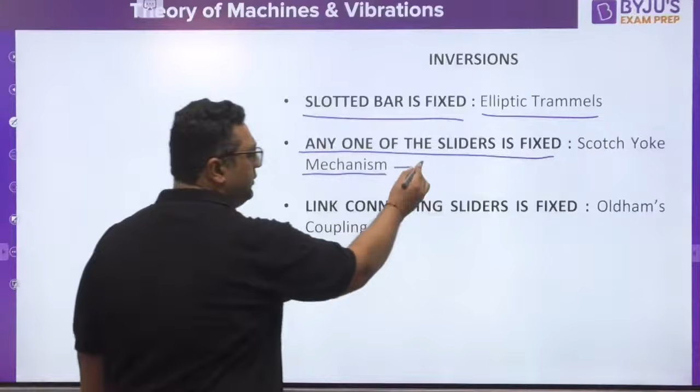The first inversion you will get by fixing the slotted bar, the name is elliptical trammel. If you fix any of the sliders, you will get the Scotch yoke mechanism, which is used to produce SHM. And if you fix the link connecting the sliders, you will get an Oldham coupling, which is used to join laterally misaligned shafts. So these are the three types of inversions we are getting.

This is elliptical trammel, used to plot the ellipse. If you put your pencil at any point of this AB, that will be plotting the ellipse. When this slider comes down, this will be going away. When this comes up, this slider will come in this direction. So this slider will move this way, this slider will move this way. This is how the motion is going on. I will show you the animation of this.

This is the elliptical trammel. You can see any point on this link will be plotting an ellipse. That is why the name of the mechanism is elliptical trammel. Are you getting it or not?

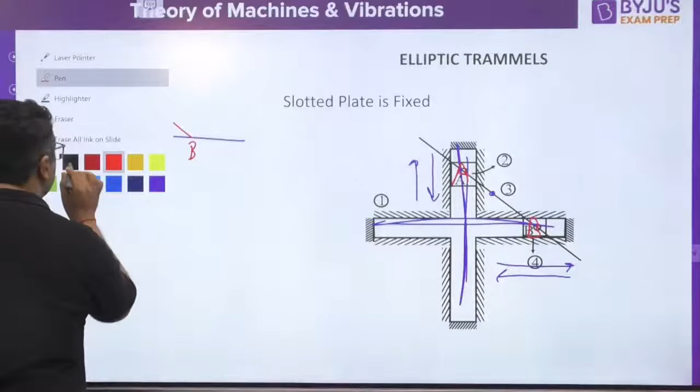We can even prove it. If we have these two points, A and B, you are going to see the locus of any point here, P, with coordinates x, y. So you know this angle is theta, this angle is theta. If I give the name here Q, here R, then you can write from this triangle and from this triangle, sine and cos theta.

If you see this is a triangle, this is a triangle. Using this triangle you can derive the equation of the ellipse. If you see cos theta is this divided by this, and sine theta will be this divided by this. So you need to write cos theta and sine theta, and when you use the equation sin square theta plus cos square theta equals 1, you will get the equation of the ellipse.

So this is how we put it. If I am putting this point as x, y, then this is going to be y, this is going to be x. So here you will write sin theta, which is nothing but y by BP. From here you write cos theta, which is x by AP. So you do sin square theta plus cos square theta equals 1, and you get the equation of the ellipse: x square by AP squared plus y square by BP squared equals 1. This is the equation of the ellipse, that is why it is given the name of elliptical trammel.

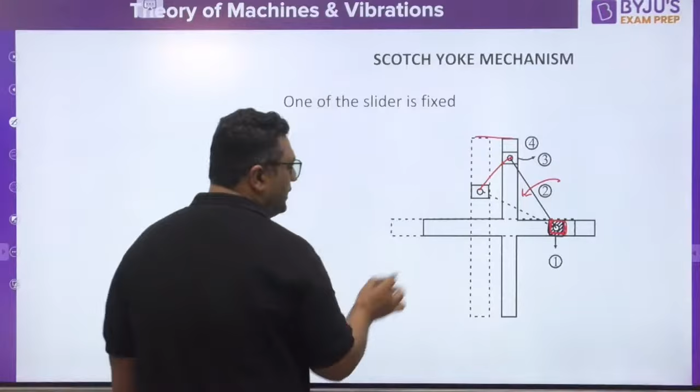Moving further, this is the Scotch yoke mechanism. If we fix this, the slider will not be moving. And if this slider doesn't move, then if you give rotation to this link, after some time it will reach here, so the slotted plate will move here. The slotted plate will have this type of motion, which is SHM. So on rotation of this link, you get SHM. This mechanism is also shown by this, one of the representations of Scotch yoke mechanism.

It is used in power hacksaws, the Scotch yoke mechanism.

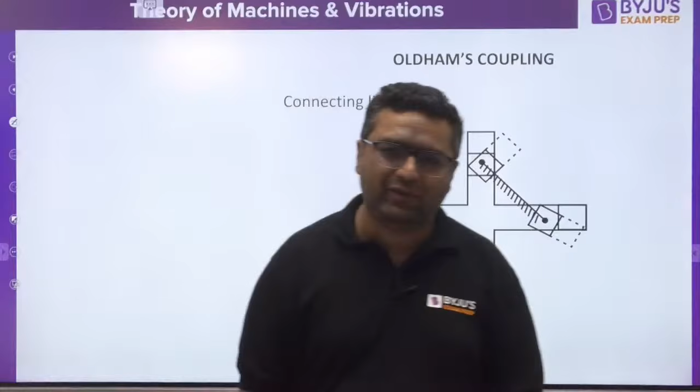When we are joining two shafts, it is said to be a coupling. If you are joining two collinear shafts, it is called flange coupling. For machine design and vibration, we will keep it in one session, and I will take it up next Saturday and Sunday to revise both, so don't worry about that.

Now, let us say this is one slider, this is another slider. If we have one shaft here and you rotate that shaft, this slider will try to rotate like this. When the slider rotates, the slotted bar will also rotate like this, and when the slotted bar rotates, this slider will also rotate like this, and then this shaft will also rotate.

So when we join one shaft here and another shaft here, they are two laterally misaligned shafts, meaning they have some lateral difference. That is why this is called Oldham's coupling, and it is used to join two laterally misaligned shafts. You can see the axis of one shaft and the axis of another shaft.

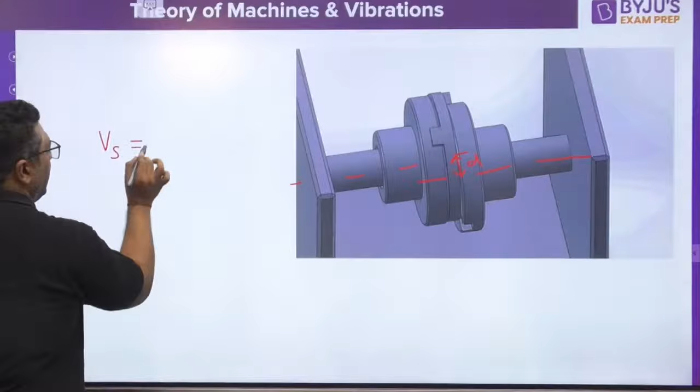And this is the lateral misalignment, d. Since the two things are moving at different axes, there will be some sliding. So the velocity of sliding is given as d into omega, where d is the offset of the shaft. This is how these things are given.

So the first chapter is over, moving to the second chapter. Don't worry, we will keep the session only up to 1 or 1:15, not more than that, because other chapters are going to take less time. Actually, in this first chapter there isn't much formula, so without the concept, just showing the formula would be useless.

But in other topics like flywheel, there are some formulas, so there we will see only the formulas. Now we are talking about velocity and acceleration analysis, and the very first approach is the instantaneous center approach. So let me explain what instantaneous center actually is.

When we talk about the simple 4-bar mechanism, we have these 4 links. Link 1 is fixed. Link 2 has pure rotation about this point. Link 3 has pure rotation about this point. But link number 4 has general motion.

General motion is the combination of pure translation and pure rotation. In reality it is a combination, and this combination is also a rough one, so sometimes translation is 70%, rotation 30%, sometimes translation 60%, rotation 40%. This type of motion is something which can just shake our souls. Okay, yes, very good, Kalyan.

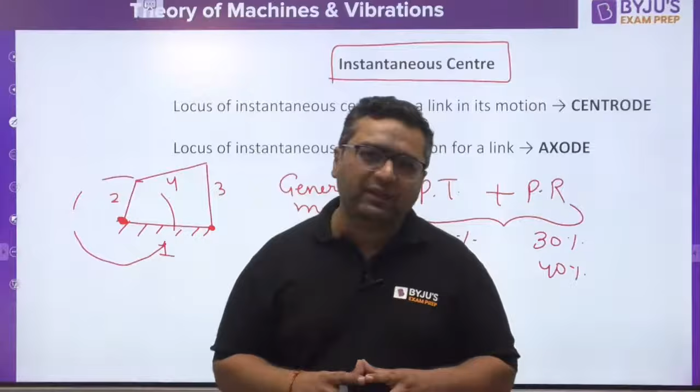So when we talk about this I-center approach, what actually is the I-center? You know, whenever some motion is pure rotation, like if this is the rotation motion, this is the center, this is the fixed center. But there are some motions which are not actually rotation, but we want to see them as rotation motion. So whenever the motion is not actually rotation, but about some point it feels like rotation, then that point is given the name instantaneous center.

So the point is clear: we are going to convert this general motion into rotation, and the point about which it will rotate is said to be the I-center. That's why the name of the approach is I-center approach.

Now, the I-center is not a fixed point, it is a moving point. When something moves, it follows some path, and that path is called the locus. So the locus of the I-center is given the name centrode, and the locus of the I-axis is given the name axode. If this is the I-center, then any axis passing through this point is said to be the I-axis.

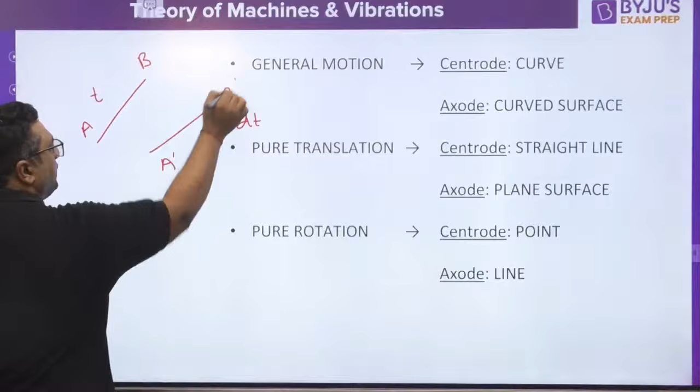I am giving you a small demonstration for the I-center. Let us say we have this coupler link separately. This coupler, let's say AB, is the coupler. At some time T, it is at this position. At time T plus dt, it reaches a new position, A-dash B-dash. So this point moves from A to A-dash, and this point moves from B to B-dash.

So my dear, if you want to find out the I-center, the method is you will sit perpendicular to the direction of motion. Why? Because whenever something is in pure rotation, the velocity direction is perpendicular to the radius.

So we are going to sit perpendicular to this AA dash. At this line, wherever you sit, you will find A is in pure rotation. Similarly, at this green line, wherever you sit, you will find the motion of B to be in pure rotation. That's why this intersection point will give the motion of complete AB to be a pure rotation motion. So this point is given the name of I-center, because about this point AB is in pure rotation.

And if you pass any axis from this point perpendicular to the plane of the board, it is said to be the I-axis of rotation. This I also taught in 1 hour in the class; here I am just completing it in 2 minutes, so this is for revision only, guys. So this is how to find out the I-center: you need to sit perpendicular to the direction of velocity.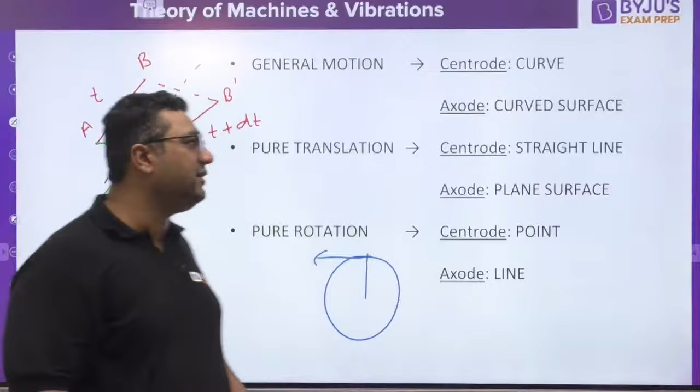Now, we are talking about the number of I-centres in a mechanism. It is given as L into L minus 1 divided by 2. So if we have L number of links, the number of I-centres will be L into L minus 1 by 2. Let us say we have 4 links in a mechanism, then 4 into 4 minus 1 divided by 2 comes out to be 6.

As there are 4 links, an I-centre is defined as IMN, the point about which the relative motion between link M and N will be pure rotation. So if we define IMN, there are 6 IMN for a 4-bar mechanism: 1,2 then 1,3 then 1,4, then 2,3 and 2,4, and then 3,4. So you can see 1,2,3,4,5,6 — these are the 6 I-centres. I must show them like I12, I13, but I am not writing the 'I' all the times.

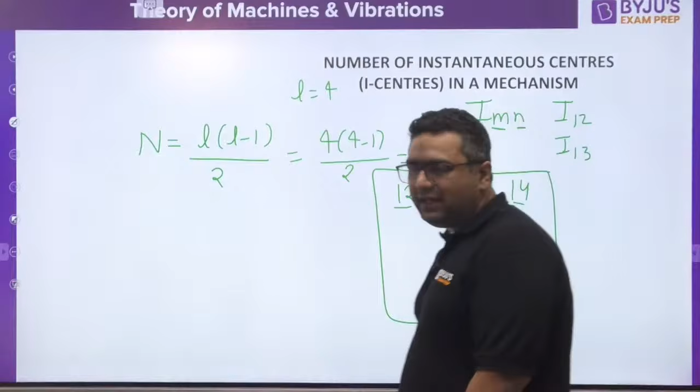If you have L number of links, then a minimum of L number of I-centres would be known to us. So if there are 4 links in a mechanism, we would know at least 4 I-centres. Generally this entire line is known, and this is known, so out of 6, 4 I-centres are known to us. The others we are going to find out using Kennedy's theorem, because for the I-centre approach, we need to apply Kennedy's theorem to find the unknown I-centres.

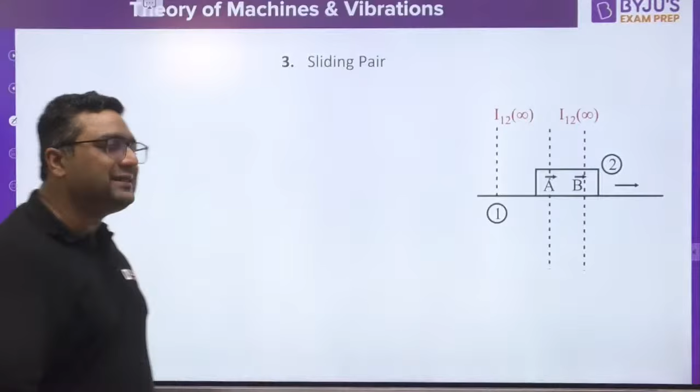In a sliding pair, we can have 3 types of surfaces. If we have a slider moving on this surface, their I-centre is nothing but the center of this surface — this is one, this is another. If you have a slider like this, then you know the velocity direction is this, and perpendicular to velocity will give you the I-centre. Here also, perpendicular to velocity will give you the I-centre.

So you get the I-centre at the center of rotation for curvatures, and for a plane surface, if you go perpendicular to the velocity of 2 points, these parallel lines will meet at infinity, so for this, I12 will be at infinity. So for a sliding pair it is at infinity, for a turning pair it is at the point of contact, and for a rolling pair it is also at the point of contact. Moving further, we have seen convex and concave surfaces — now, okay, this is not required.

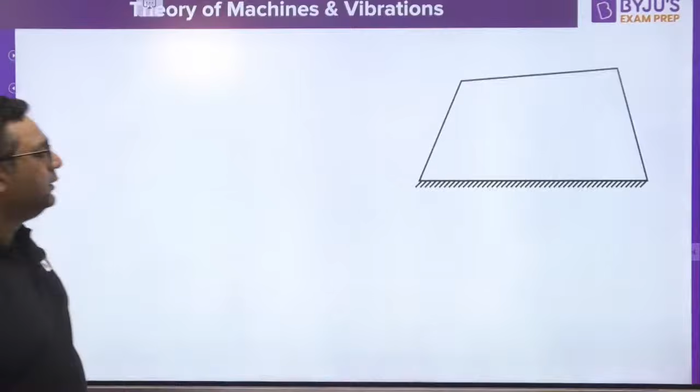Okay, now we are going to see the instantaneous center approach for one mechanism. I will show you only for one mechanism, and then we will move to the relative velocity approach. So, when we are talking about this, this is a simple 4-bar mechanism.

If you see, this is OABC. So whenever you see this mechanism, how to solve it: you will say the number of links are 4, and the number of instantaneous centers are 6. I have seen this with the formula.

So if you see, this is link number 1, link number 2, link number 3 and link number 4. You will write all the 6 instantaneous centers: 1,2; 1,3; 1,4; 2,3; 2,4 and 3,4. Then you will see all the known instantaneous centers.

So you know that this is a turning pair, so I will call it I12. This is a turning pair, I will call it I23. This is a turning pair, I will call it I34. This is a turning pair, I will call it I41. So these are 4 turning pairs, 4 instantaneous centers we got from here.

And these 4 instantaneous centers are known to us. As I already told you, the minimum number of instantaneous centers known equals the number of links. We may know more than that, but that is always the minimum number known to us. So guys, we have these 2 unknown instantaneous centers.

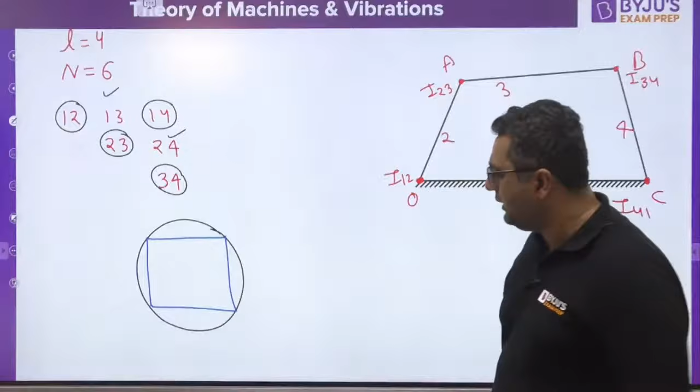And to find that out, we are going to use Kennedy's theorem. What is that? We will be making a circle, and in this circle, we will be making a quadrilateral or a polygon which has the same number of sides, equal to the number of links. So 4 links will give you a quadrilateral: 1, 2, 3, 4.

So my dear, if that is the case, 1,2 is known to us, 2,3 is known to us, 3,4 is known to us, 1,4 is known to us. The first unknown instantaneous center I will be showing is 1,3.

If you want to reach from 1 to 3, there are 2 possible paths. One is 1 to 2, 2 to 3. The second path is 1 to 4, 4 to 3. So these are the two paths you can follow.

So if these are the two paths we can follow to reach from 1 to 3, you need to extend the line joining these two instantaneous centers, because 1,3 will also lie on that line. This is because Kennedy's theorem states: if we have three links 1, 2 and 3, then from these three links we can have three instantaneous centers: 1,2; 2,3 and 1,3. And for relative motion between these three, they must lie on a straight line. That is Kennedy's theorem.

So 1,2 and 2,3 will be on a line, where 1,3 will also lie. So I will extend the line to find out where 1,3 is. Similarly, on these three, the instantaneous center will lie on the same line: 1,4 and 3,4. We will extend this as well. So when you extend this, you will get I13 here.

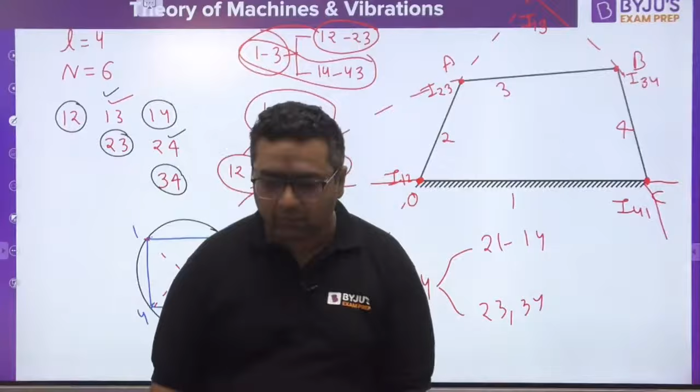So guys, we have already seen Kennedy's theorem. Now we are moving to the relative velocity method. Before that, I will tell you the theorem of angular velocity.

I will not derive it like I did in class, I will just state it. In class I derived it using the turning pair. This is the theorem of angular velocity. If you know the angular velocity of link number 2, you can find it for link number 3 using this equation. This is how we use the theorem of angular velocity.

Now we are moving to the relative velocity approach. What is the logic behind it? Let us say we are talking about a link which has general motion, meaning it has two types of motion: one is translation, the other is rotation. Let us say this link AB has both motions.

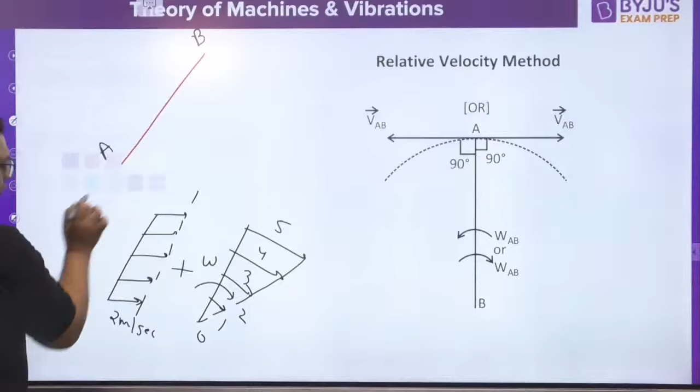Let us say the translation velocity is 2 meters per second, shown here. And the rotation velocity starts from 0 and increases linearly, v equals r omega, like this: 5, 4, 3, 2, 1, 0. If you connect both, you get the velocity value 2 here and 7 here. This is the velocity profile, increasing from 2 to 7. You can see this part is translation, this part is rotation.

So what did Sir Kennedy say? He said if you are sitting at point A, your velocity will be 2 meters per second, and you are looking at B, whose velocity is 7 meters per second. So tell me, if one person is moving at 7 meters per second and you are moving at 2 meters per second, what will be the velocity of the other person according to you? If this is A and this is B, what is the velocity of B with respect to A, guys?

What will be the velocity of B with respect to A, guys? Tell me, tell me, tell me. Yes, 5 meters per second, very good. So it is going to be 5 meters per second. The velocity of B with respect to A will be 5 meters per second.

But if you see, 5 meters is the velocity due to rotation. So what does that mean? In reality, this link has both translation and rotation, but when you sit at point A, you remove the translational component, so you will only be able to see the rotation. So guys, when you look at the velocity of one point with respect to another, you will see only the rotation component. According to you, the motion appears to be pure rotation. That is the relative velocity approach.

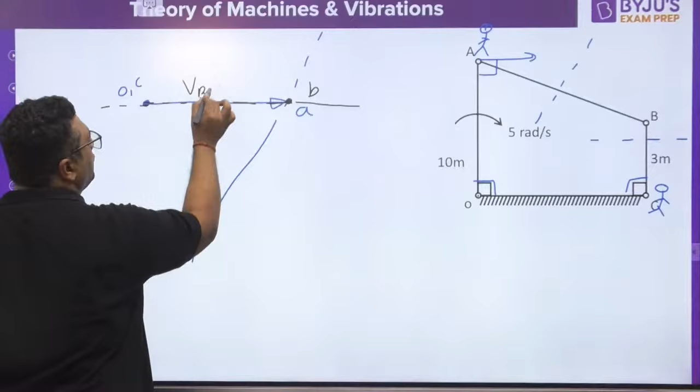So you were saying B is on this line. Now you are saying B is on this line, so you are going to get B here only. You can see velocity of B with respect to C and velocity of A with respect to O are equal. So we can write velocity of BC equals velocity of AO. This question has been asked 5 times in GATE. So you will write BC into omega BC equals OA into omega OA, and equating this, you can find out omega of BC, which is asked in the question. So this is the first type of question coming from the relative velocity approach.

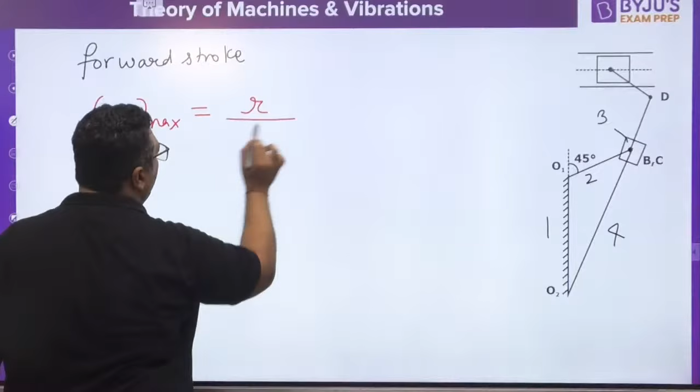The second type of question is coming from crank and slotted lever mechanism. This is link 1, this is link 2, this is link 3, and this is link 4. Whenever we are talking about forward stroke, I am writing the direct formulas here. For forward stroke, omega max comes out to be R upon (R plus L) into omega 2. And for return stroke, we have omega max equals R upon (L minus R) into omega 2.

Okay guys, is it clear to everyone? If you see these two slides, you can solve any question from the relative velocity approach. So this is how the formulas are done. I have covered the relative velocity chapter in hardly 10 minutes. This is how the formula session should be. Other chapters we are going to cover like that, because for the crash course we will have another series next month where we teach all subjects in detail. In the formula series, we must only show you the formula.

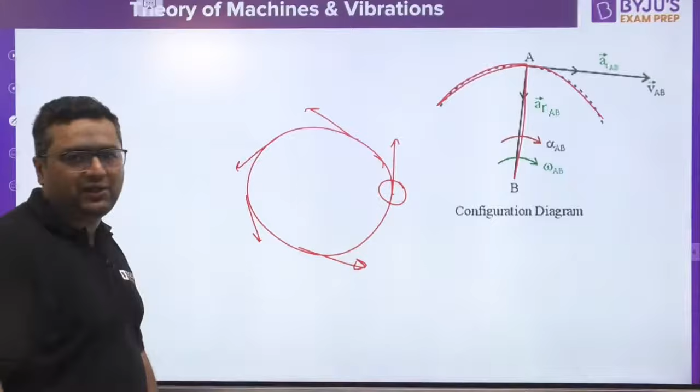So in the acceleration diagram, when we have a link which is having rotational motion -- why? Because we have converted all the links' motion into rotation -- then there are some kinds of acceleration working. When some body is moving in rotation, its direction is always changing throughout. So direction of velocity cannot change without acceleration. To change this velocity, there is a radial acceleration acting toward the center. Always there is a radial acceleration acting towards the center, and this radial acceleration is given as omega square r.

This means that even if a body is rotating with a constant angular velocity in circular motion, it will still be an accelerated motion. Circular motion can never be a uniform velocity motion -- it will always be an accelerated motion. Why? Because even if the body is rotating with constant angular velocity, its direction is changing all the time, so this radial acceleration will be coming.

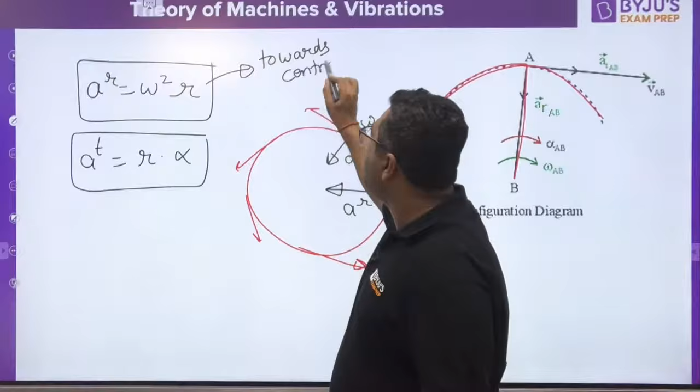Now, if the magnitude of velocity is also changing from omega 1 to omega 2, then there would be some angular acceleration alpha also acting. For that, there is a tangential acceleration AT, given as r into alpha. So when we talk about radial acceleration, it always acts towards the center.

And tangential acceleration always acts perpendicular to the link in the sense of alpha. Like if alpha is given in this direction, then tangential acceleration will also come in this direction. Is it clear for all of you guys? So if you see both accelerations, they are perpendicular to each other -- radial and tangential are perpendicular. So you will say the net acceleration is root of (radial squared plus tangential squared).

This is the net acceleration for this case. Is it clear, guys? Is it clear, guys, for everyone?